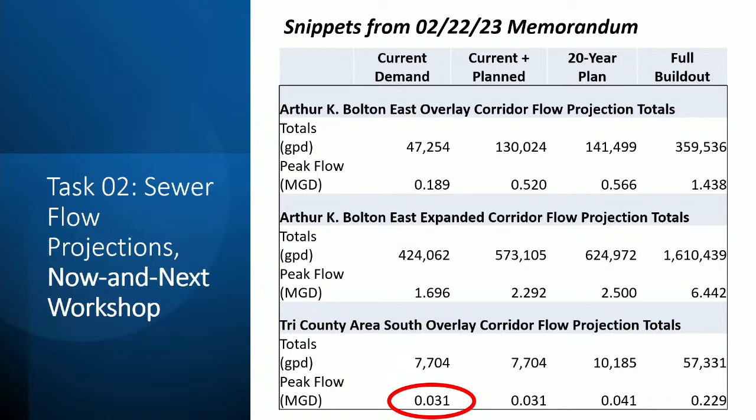But I wanted to diverge briefly and hit on treatment options. I have a recommendation, but I want you to understand what the options are, and you can direct me to go somewhere else if you'd like.

What I'm referring to is basic land application, or LAS. This is essentially a way to treat the water to not a super high standard, but to treat it, and then dispose of it on the ground or in the ground. It requires land to do that. You can do it subsurface, which means you don't have to add disinfectant, but it's not often done—it's more expensive and hard to see where it's going and maintain.

If any of you have ever had a drip irrigation system and something breaks, trying to find out where it's broken is pretty hard to maintain. So the spray field option is by far the most common.

These require a significant amount of land, and the amount is a wild guess right now because we don't know your perc rate. To give some instances: there's a 100,000 gallon a day system in Walnut Grove that's only using 50 acres. But Oconee County has gone through this and has a 400,000 gallon a day system—it's over 350 acres, with buffers required and that sort of thing.

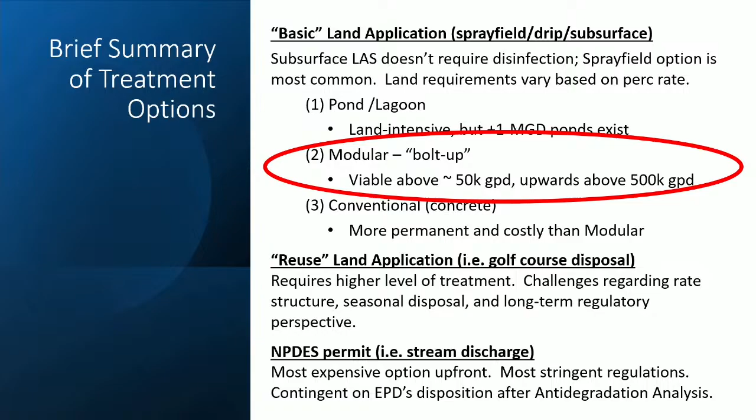Okay, so remember those numbers we talked about before. It was 189,000 for AKB, small area, and I've circled the recommendation here. So a closer look at AKB. The green boundary was the one, based on your feedback, that was the expanded, big picture goal. And then the purple there was the tighter overlay.

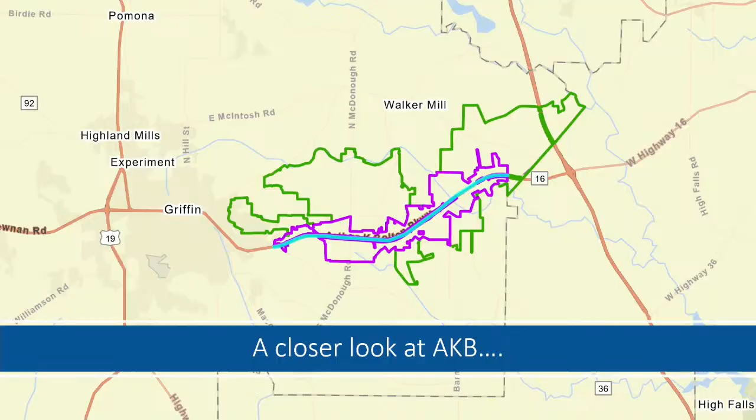And I just drew a blue line along AKB, just along the corridor. You'll note I did not branch out from that main pipe, if you will. I want to talk about what might go into a project like that.

So that minimum demand from the prior report, which was called the current demand or flow, was 189,000 gallons per day. But we've discussed that that's not a realistic number, certainly not for day one. So I thought, let's look at a concept of 100,000 gallons per day. It's just a starting point.

And I put together some very, very high level costs. These costs do not include some very expensive things: design, permitting, supporting survey, geotech, any kind of legal associated with land acquisition, or land acquisition itself, whether it's easement for pipeline or plant, pump station property.

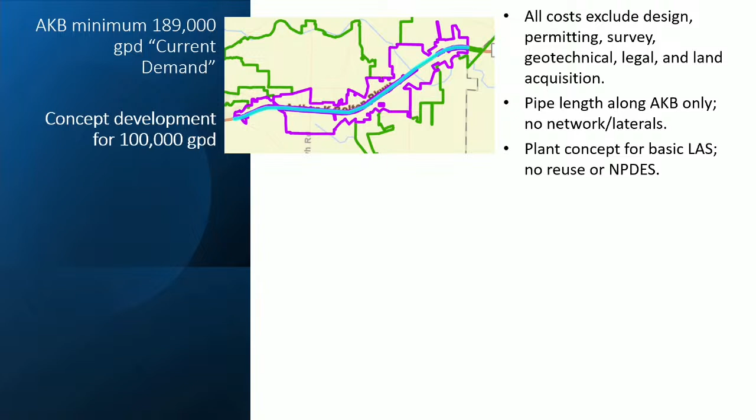As I stated, the pipe length that I sketched out there, that blue line, is just along AKB. It's not a network from there. And the plant concept is based on the basic LAS.

So that length is approximately 34,000 linear feet. If you look at whether it's 8-inch gravity sewer or force main, really irrespective of material, PVC, HDPE, and ductile iron are pretty similar right now, including the appurtenances and clearing. So we're looking at over $25 million for that length of pipe alone.

This target area has a low point and will require a pump station somewhere to get flow from one side to the other. So a small package pump station, roughly $1.5 million. For the modular plant, City of Mansfield recently got a proposal for a 100,000 gallon per day system, so I took theirs and built on it, had some exclusions, and plugged in $3 million.

And then you've got the LAS pond and spray field. There was a recent project for a 100,000 gallon per day spray field, and it was about 2.5, so I plugged in 2.5 there. So that's a total of $32.5 million for this, what I would call a base concept for AKB.

To put that into context, and I'm going to use residential throughout this presentation, even though I understand most of your development planning is not residential, but it's an easy estimator. So if we talk about a residential context at 200 gallons per day per household, that 100,000 gallon per day concept would cost each homeowner effectively $65,000 per home, not including the exclusions, the very big exclusions that I noted here. 65,000 per home, roughly.

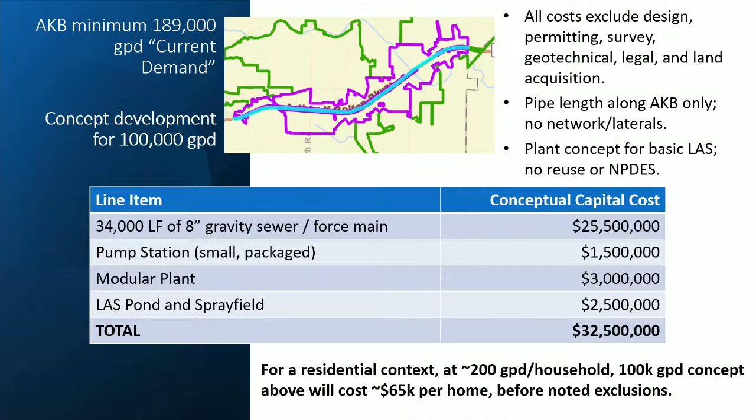I'm looking at Steve - that's correct, yes ma'am. So privately owned, but I'm just saying there's a potential for us to be able to work access inside the right of way through GDOT's. Right, but you still have to buy the land for the spray field.

Yes, depending on what the land percs at, how many acres you're gonna need. But it wouldn't necessarily be GDOT, or would that just be - the land would be ours, so we'd have to purchase that land, but working inside their right of way would not cost us for the sewer line.

So what you're telling us is that even the limited look at AKB is mind-blowing numbers. That's right. I got that. Okay, so what's plan B? Are we going to go home now?

I have a few suggestions to think about. I don't want to leave you despairing. We're not despairing, all right. I felt like this was important to look at because the numbers in your prior report were so ambitious, and I don't want to get you to the end of this study with something that makes absolutely no financial sense.

I wanted us to know there would be very little residential application during the short plan out for AKB. I'm saying that because so many industrial customers want us to help provide sewer, so that would be the only possibility for us getting customers in that initial area.

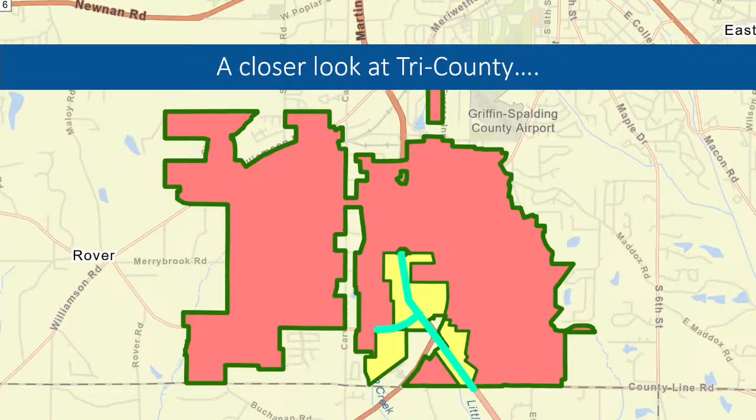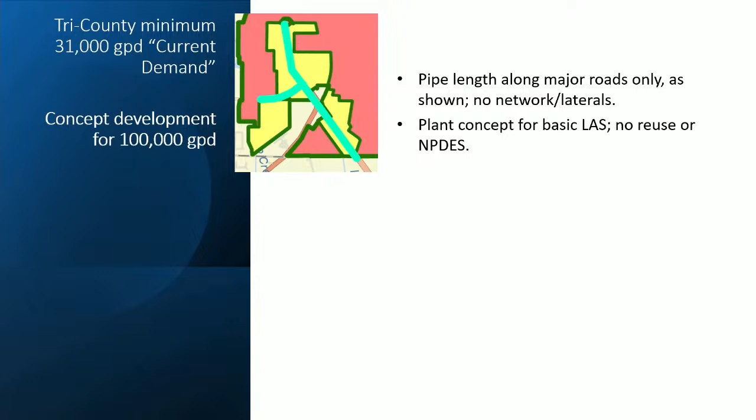The minimum demand in the calculating report had been 31,000 as current demand, but let's stick with the 100,000 because there are economies of scale in building a plant. You can build a plant twice the size of what you need to grow into it a lot more cost effectively - it's not times 2 to double the size of the plant.

These line items here, that length totaled up to 9,930 feet. Again, assuming 8-inch gravity sewer, $7.5 million in pipe cost here. In this particular zone, you shouldn't need a pump station. Same number for the modular plant, same number for the pond and spray field, and we come up to about 13 million - which is still a big number, but it's a fraction of what we were talking about for AKB.

I did want to point out that pipe is still a large part of this cost - it was a very large part, 80% or so of the AKB, and still 60% of this one. So we're getting a little closer, maybe, to a number that might be manageable when you divide it into the number of customers that really have interest in connecting soon. Still concerned about that pipeline number, and I thought you might be too.

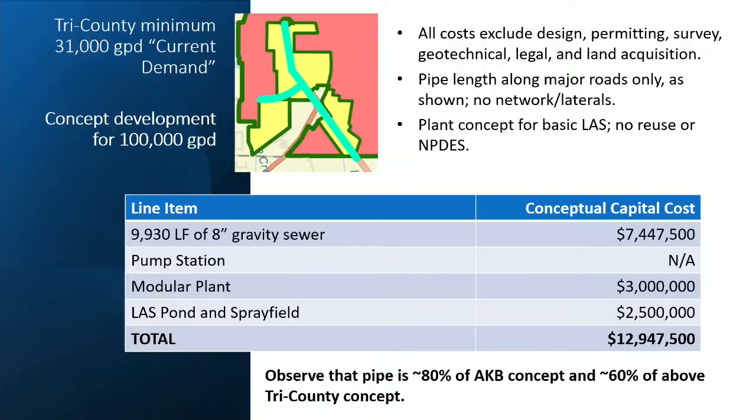So I wanted to introduce another option for you to consider. Anybody familiar with low pressure sewer? A little bit, okay.

Low pressure sewer has been done for a long time, very successfully. It's not widely used in Georgia - there's probably a dozen folks doing it. It's widely used in East Tennessee and Florida, for two very different reasons: Florida is really flat, and East Tennessee is really hilly. So for both reasons, it's used a lot in those places.

It's an alternative to conventional gravity sewer, but it can be used in combination - utilities often have some sort of conventional gravity sewer, meaning manholes and pipes that slope on grade where everything is under gravity. In the concept of a low pressure sewer, everything's under pressure, and the operating pressure depends on how many connections you have and the head conditions of your configuration. It could be as high as maybe 80 PSI, which isn't particularly low, but you want to keep it relatively low because that keeps down some of the maintenance.

So every customer, if you imagine a subdivision, every one of those houses is going to have its own little pump station, a grinder pump station. It's a pump that grinds and chops, and because it's chopping flow into little bits, you can use smaller pipes. And again, because it's under pressure, you can use smaller pipes.

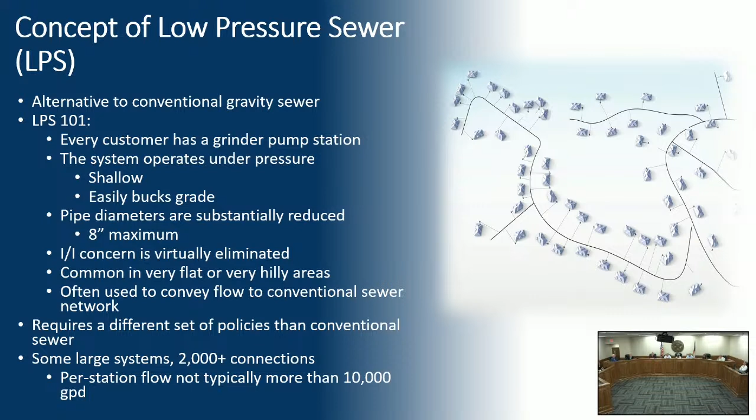So we could technically or theoretically convey cheaper going this route. You want to look at it? Yes, I do. All right, let's look at Tri-County.

Okay, I was thinking of a neighborhood right now. Well, I think this area is mostly commercial, and business owners probably aren't as freaked about having a grinder in their front yard as homeowners are. If you put the grinder in the existing septic tank though - well, I understand, I've been down that route - but still homeowners are more freaked than business people.

I had one growing up. It wasn't actually a low-pressure sewer, but our septic tank wasn't built quite low enough, so we had a pump in our basement, and it was bad news when it rained and that hole filled up with water. But other than that, you just didn't use the downstairs bathroom - otherwise you didn't even know it was there.

And if you decide you want to get serious about considering this, there's tons of material on best management practices, policies, case studies, utility videos, utilities giving their testimonies about what they've experienced. And that's a whole other policy-driven decision, but just in terms of logistics and cost here...

So we get to reduce that peaking factor - that 7704, originally it was times 4, that was at 31,000 gallons per day. But if you assume 200 gallons per day per connection, which I'm using residential because it's easier, it's just a baseline.

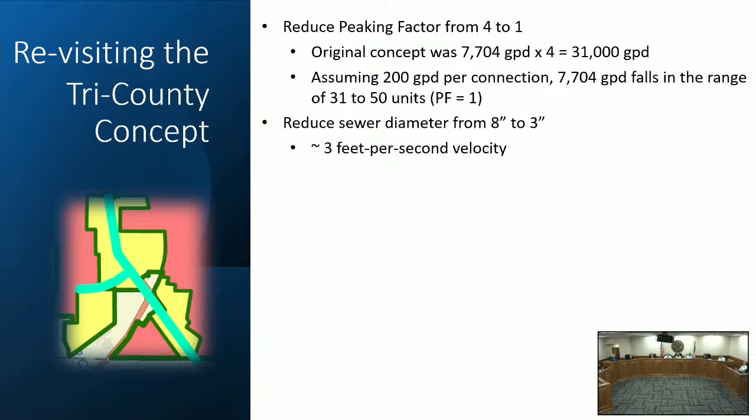So this would allow you to, conceptually, reduce your sewer diameter from that 8-inch before to 3-inch, over 10,000 feet, same number. Now of that 3-inch low pressure, we're talking about $1 million. That gets your total to 7-ish, again, very high level conceptual.

Now recognize that I have maybe hand-waved the cost of the grinder units. 20,000 is probably a very conservative number, and often it's like 7,000 or 8,000, but it depends on how many you're doing, and maybe the distance from the customer to the main pipe.

But it's better than $68,000 per house. Once you implement a policy, it'll be the developer or the homeowner - that cost would be part of their build generally.

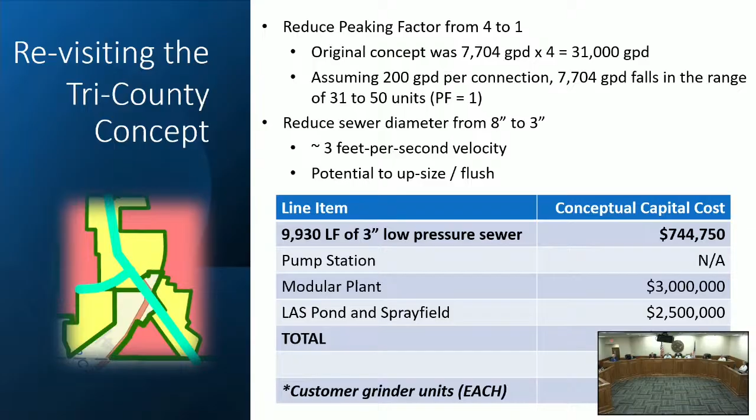You were interested in a modest means of entry. Good, that's a good idea. So I think that, and I'm kind of towards the end here, hoping for some open dialogue - key questions to consider next as we move into next territory.

Looking at that 20-year horizon, weighing your capital and long-term O&M, temporary and permanent, making the best financial decision, but recognizing that it's planned for 20 years, which is essentially the end of life for most equipment, that sort of thing.

To the extent you can give me feedback on where you might want to invest more capital - for example, if we're talking about gravity sewer versus low pressure sewer, if you really feel like those big flow numbers in any particular area... you can have a different opinion for different areas. You may say, hey, Tri-County, low pressure sewer sounds great, but AKB, we want to grow big. Let's keep it conventional.

We can do whatever you desire doing, but feedback on making decisions about where you want to maybe invest more in capital, and with the extent of being able to grow. Preference for restricting or compartmentalizing growth - again, this is how expandable do you need or want your system to be.

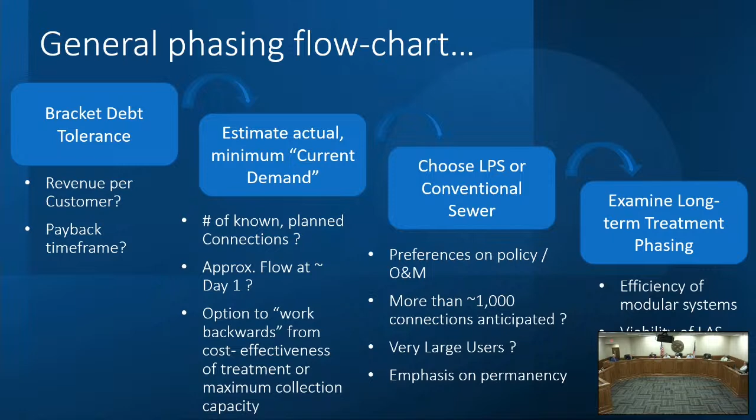That's a really big issue that she's talking about. I spent some time talking to a Henry County Commissioner about how they developed. And they said, once we opened sewer up, our entire county changed. We had the same basic requirement, you have to hook on, because that's what they wanted, to be able to get revenue to begin with. And then everybody came.

The exact same thing is happening, like she said, up in Teamon and 155. We took the Sun City plant, and they said there's sewer there, and all of a sudden, thousands of homes have all of a sudden jumped up and said, we want to do this. Now, that's a whole lot different than most of our community, Spalding County, is looking for.

We run it down AKB, and if we do the same thing we see that happened up in the northeast corridor, we're talking about a huge change in what our county looks like. As an example, we're going to probably increase our population over the next 2 or 3 years because of the housing, 10%, just up in that northeast corner.

We run it down AKB, this will develop into a different county. And you have to think through, yes, economic development is good and all of that stuff, but what do our citizens who live here and have lived here all of their life, what do they like because of the uniqueness of ours? Now, just so everybody understands, the county manager will talk to you about how you can't do one without the other.

There are 3 parts of it: commercial, industrial, and residential. You have to move in those 3 circles simultaneously. You can't just say, we're only gonna do commercial. When we run it up AKB, if our mind is only commercial, I'm telling you, that won't happen.